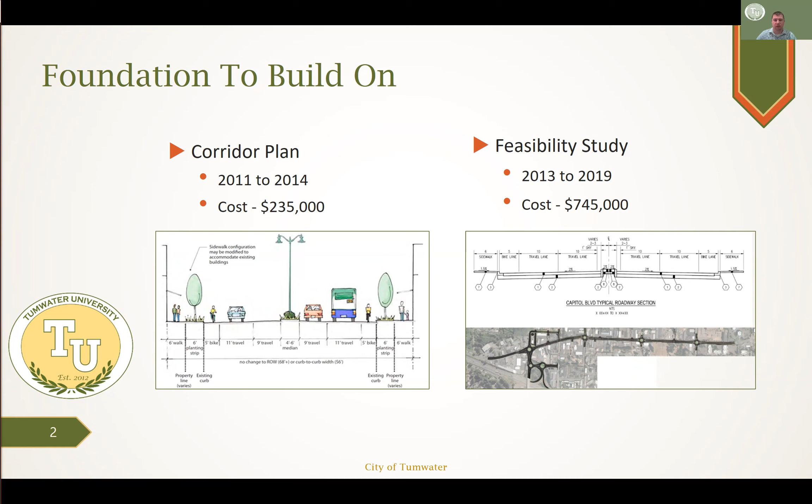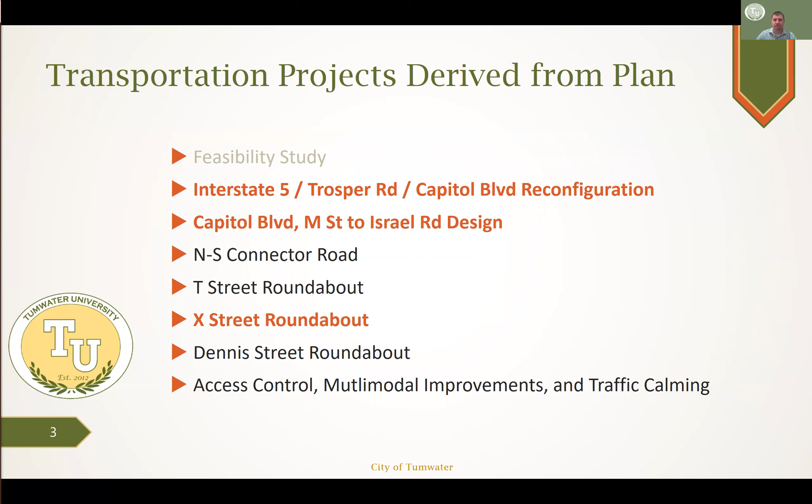We'll start with the largest project that came out of the corridor plan, and that's the reconfiguration of the entire east side of the Trosper Road interchange. This is a significant 3 roundabout project that will have major traffic routing impacts in Tumwater. It will completely change the operation and aesthetics of a gateway to the city.

The total project cost is estimated at $14.9 million, and funding is provided by a $6.6 million grant from the Transportation Improvement Board and $8.3 million in local funding, which is programmed in our capital facilities plan documents.

We began design of this project in 2018 after an interchange justification report was completed as part of the feasibility study. We have also been acquiring right-of-way from the property owners in the project limits since 2019.

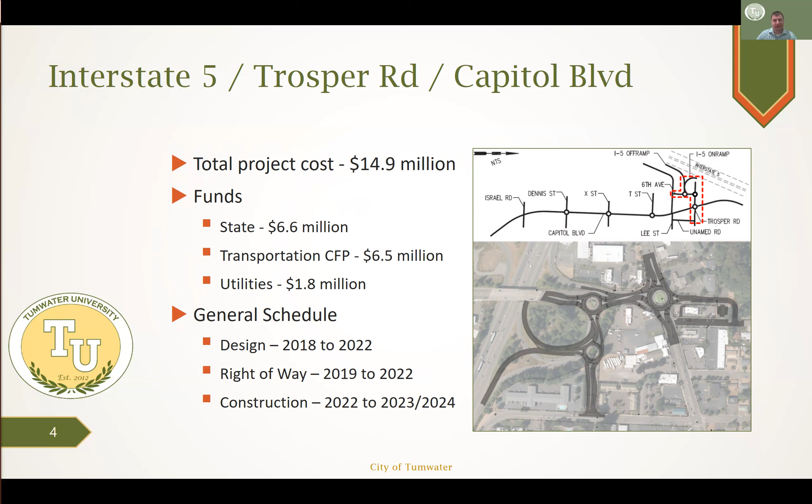We have acquired and recorded most property needed for the project and have reached agreements with property owners for the remaining. We hope to be complete with design by this spring and intend to start construction late this summer. The project will likely take 2 years to construct, and it will be a major disruption to traffic.

Now for a slightly more detailed schedule on the large project. We are wrapping up a small demolition project to remove 3 structures that are within the new road improvements.

Our goal is to have the large transportation project out to bid for construction by this May, which, after going through all of the contracting and approval steps, would put us at starting construction late summer to early fall this year. We won't really know exactly where the contractor will choose to start because the phasing is generally within their control.

But we anticipate they will focus on utility work and the new 6th Avenue alignment, which connects Lee Street directly to I-5 and Trosper Road this year.

The utility work will be very impactful to the traveling public because it is slow-moving work, and the tasks are spread throughout the entire project limit. So it'll happen on Capitol Boulevard, Trosper Road, the new 6th Avenue alignment, and it's going to be a lot of work.

In all likelihood, they will not be able to take on the Capitol Boulevard and Trosper Road or Trosper Road and 6th Avenue roundabouts until next year.

We are still aiming for project completion by the end of 2023, but it's looking more and more like it will continue into early 2024 at this point.

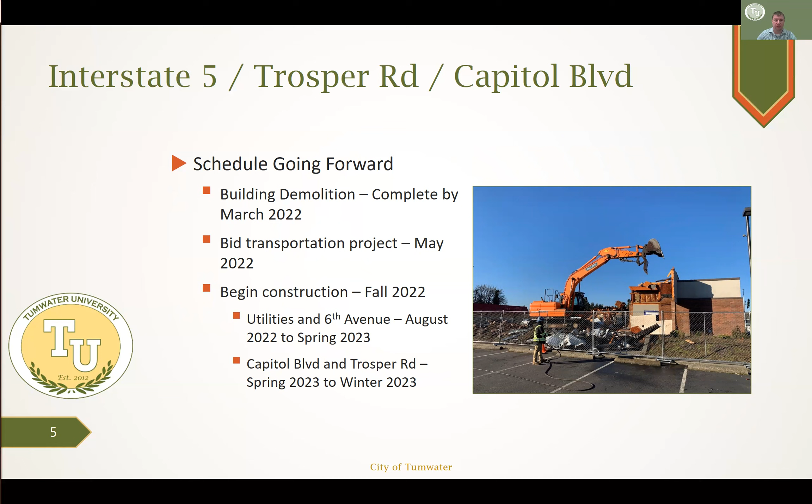Some commuters may completely avoid the project area, but there will still be significant delays. Even if you avoid the project limits, you're probably going to notice impacts on other streets. It's hard to say exactly what it's going to be like given the impacts COVID has had on travel for work, but we still know that it's going to be quite messy.

Pre-COVID, 37,000 vehicles traveled through the intersection of Capitol Boulevard and Trosper Road on an average weekday. That's a lot of trips to manage through the work zone and the alternate routes.

We do want to stress that we will have robust traffic control through the work zone, and all businesses will have access. So don't avoid the area if you want to shop, grab some coffee, or eat at any of the several restaurants in the vicinity. We will get you where you want to go, and local businesses will greatly appreciate if you continue to stop by.

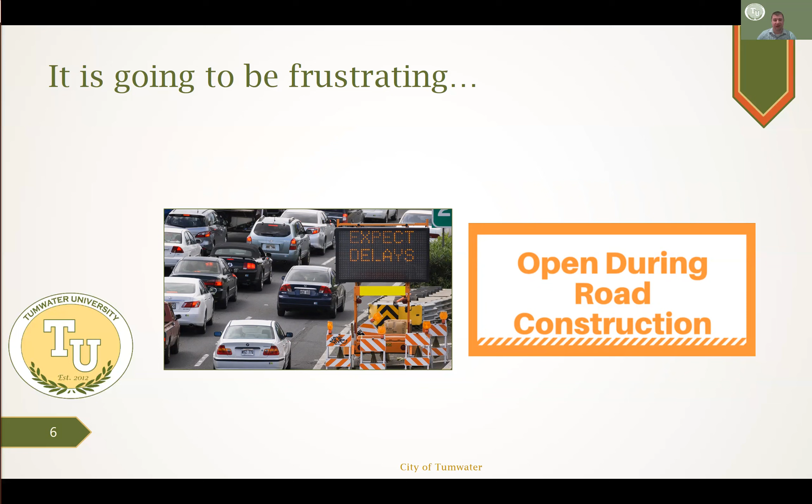The next active project I will discuss is actually a design-only project. We've begun design of the remainder of the projects in the corridor for several strategic reasons, including eliminating risk from not knowing many of the project details, refining cost estimates for budgeting, and bringing the projects close to what is called shovel ready, which improves our chances of obtaining grant funds in the future.

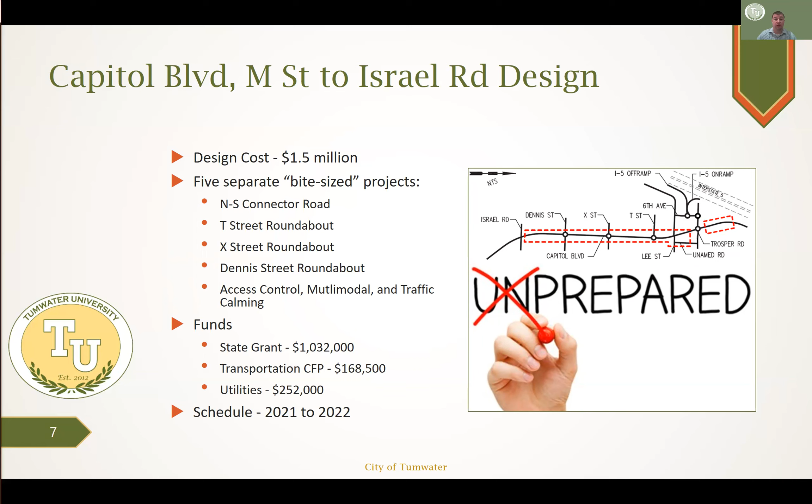We have split the remaining projects into 5 manageable size ones that I will touch on in the next couple slides. We were able to leverage over $1 million in grant funds, utilizing approximately $170,000 in local transportation funds for this project. We are also going to be designing upgrades for aging infrastructure, mainly water, sewer, and storm, and the design work is scheduled to be complete by the end of this year.

The other active project we are working on now is the X Street Roundabout. We are currently working on design and preliminary right-of-way activities and intend to start right-of-way acquisition negotiation later this year. The cost estimate for this roundabout is $6.9 million, and we are working on design details now with the hopes of reducing impacts to property owners and reducing the overall project cost.

We have received 2 separate federal grants administered through Thurston Regional Planning Council for this project, totaling a little over $1.1 million. We have about $4.6 million programmed in the transportation CFP for the balance of the transportation costs, but we will continue to apply for grants to try to bring that down. The project also includes approximately $1.1 million in utility work that will be funded by the applicable capital budgets.

Construction was scheduled for 2026. That will likely move into 2024 or 2025 if we are able to work through property negotiations quickly.

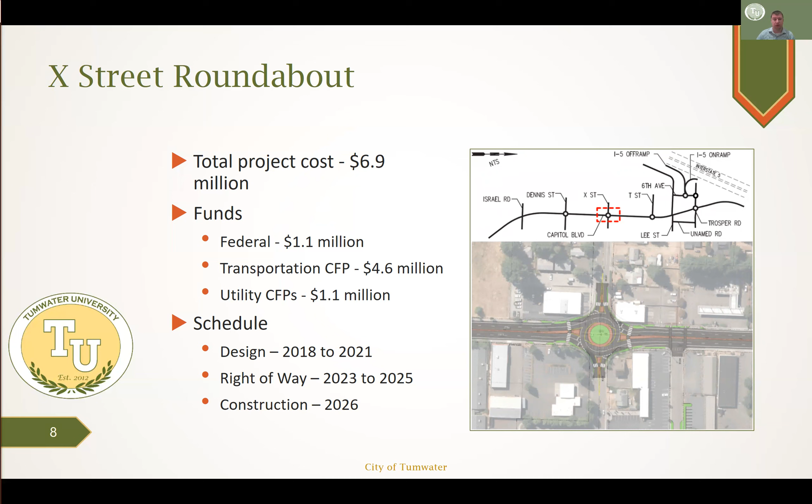The next one, the T Street Roundabout, has a cost estimate of $6 million. It is unfunded and we do not currently have a construction schedule. Timing of this project will be development driven, as it's likely going to be constructed concurrent with the redevelopment of the former WSDOT Olympic Region site, now that they have relocated to a new facility in Lacey.

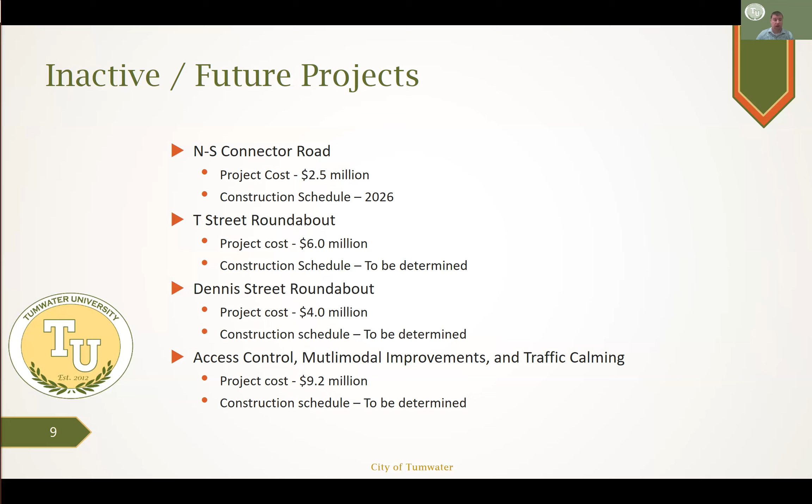Although we have it programmed as one project, it's likely going to be pieced into several smaller projects, or portions of it will be added to the larger roundabout projects. The cost estimate for this work is about $9.2 million, and it is also unfunded, and again, we do not have a construction schedule at this time.

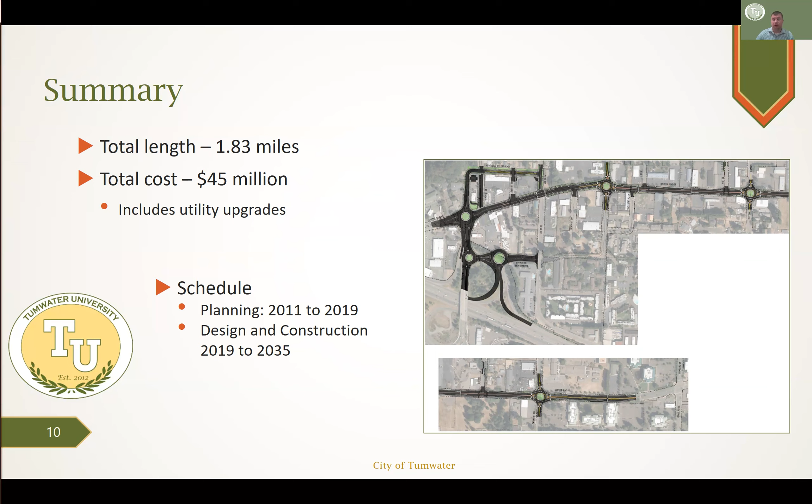So now to wrap this all up, the total length of road improvements from the corridor plan is about 1.8 miles, and approximately 1.2 miles of that is along Capitol Boulevard. The estimated cost for all of the projects combined is $45 million. Needless to say, that's a staggering number, but it's quite necessary to avoid gridlock in the near future, and the planned improvements are the only viable option for improving non-motorized transportation along the corridor. We started planning for the corridor in 2011 and hope to complete all of the transportation projects derived from the plan by 2035.